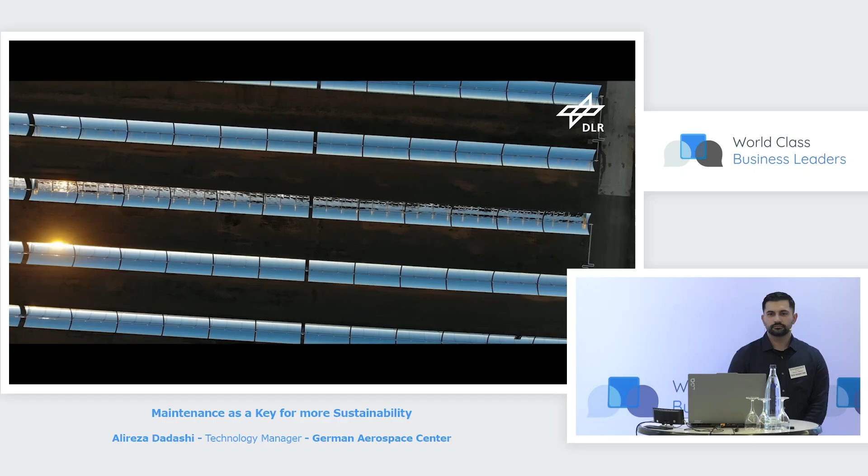Our destiny is always to go and see what's further and what's next. Let's go.

Right, so as you can see, we have lots of different projects, lots of different topics that we are covering, but not all of us are doing research. So we have the research institution, but we also have the space agency, which represents the interests of the German government in Europe and worldwide. And we also have the project management agency. That's why you might know DLR as well, because they distribute funding from the ministries.

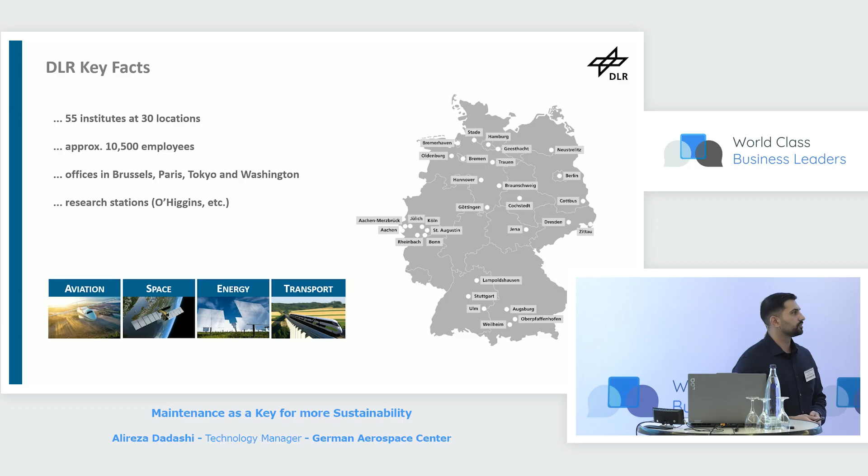Yeah, we cover aviation, space, energy, transport. So there are a lot of different topics and collaboration opportunities, of course. Some key facts: we have 55 institutes all over Germany, also some sites abroad, and roughly 10,000 employees in all these locations. And my institute is the Institute of Maintenance, Repair and Overhaul.

And we're located up in the north in Hamburg. We were founded in June 2017, so we're relatively young and relatively small with 60 employees. But still we try to really position the research into this maintenance perspective, really covering those questions. We've heard some keywords today, Marvin, you mentioned predictive maintenance, and these are the really relevant challenges in the industry that we are contributing to. And we also have labs.

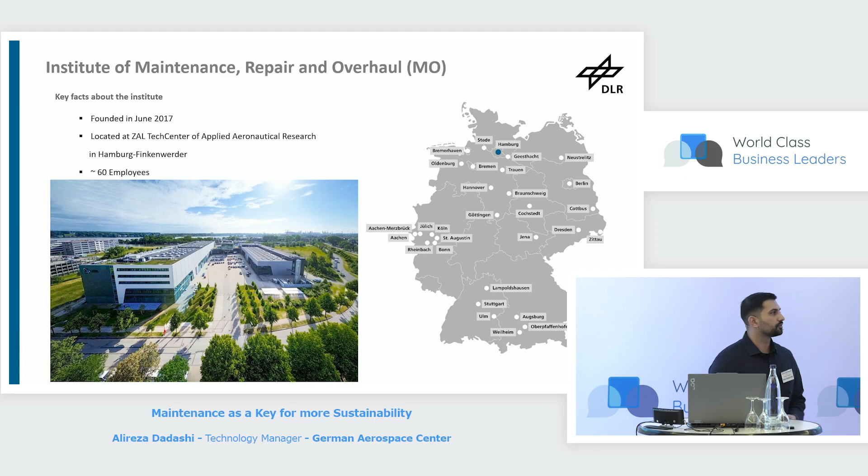So we have a big MRO lab in this building in Finkenwerder. Those who know Hamburg know it's the place where Airbus is, south of the river. And we collaborate with Airbus, of course, and also other companies in this sector. Looking at our institute in terms of our strategic research, our vision is we maintain mobility for a sustainable future. And we do this with 3 dimensions.

These dimensions consist of, firstly, the product life cycle perspective. So really look at what are MRO concepts and strategies? How can we develop those along with the product life cycle? We look from the design phase until the end of life of a technical asset, primarily an aircraft, and look at the topics of environmental analysis and circularity, but also the cost-benefit perspective. This is the life cycle modeling.

The second department is really looking hands-on at the maintenance technologies. These are the people working in the lab, focusing on technologies for assisting the human, human in the loop, for example AR, VR assistance systems. Then we have robot assisted inspection and repair, focusing on robot inspection and robot activities in, for example, engine maintenance. And we have technologies for more data-centric MRO, because a lot of data is already in the aircraft from all the sensors, and the MRO equipment is also generating lots of data.

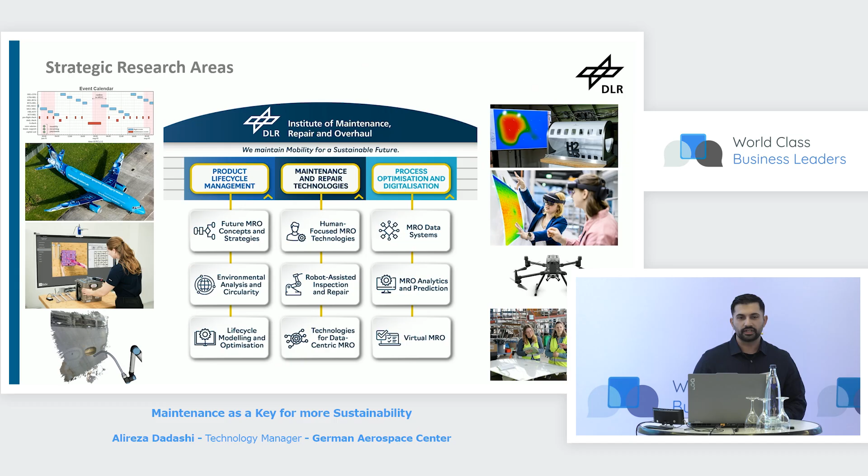So data is a good keyword for the last dimension, process optimization and digitalization. This is where all the data comes together, and we try to work towards digital twins where we can analyze and perform future predictive analytics, AI-based models. So this is what we cover at a first glance, and I want to talk firstly about maintenance in general.

So what is maintenance? If we look at the sky, we see the aircraft, and we don't think about maintenance, which is a good thing, because if you think about maintenance, it's a bad sign. We hear about maintenance when we have delays, hopefully not when we are already sitting in the plane. But there are, of course, lots of different activities in maintenance. According to the standard DIN EN 13306, the main task is to maintain the target condition of the technical system, and it encompasses activities that aim to prevent failures, restore functionality, and continuously improve the system's performance.

So if we look at the right-hand side, this is the corrective activity. This is after detection of a failure. That's what you don't want to have, because then it's already too late. So then it's about where do we have, for example, a crack on the fuselage, on the wing? How deep is it? What is the diagnosis? And then we try to repair it, maybe temporarily, and check if the function is still working.

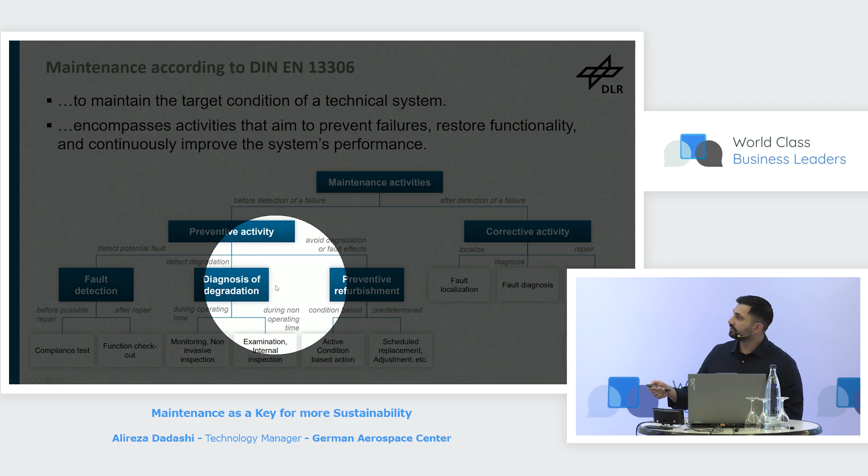The better side is the left-hand side, because then you can get ahead of the failure. So you try to be preventive. First you can detect the fault by the function, so you do function tests. Then you have the diagnosis of the degradation, detected, for example, by condition monitoring. So you have lots of data, lots of sensors, and you try to really monitor the health status of the component by, for example, regular inspections, non-invasive inspections, internal inspections.

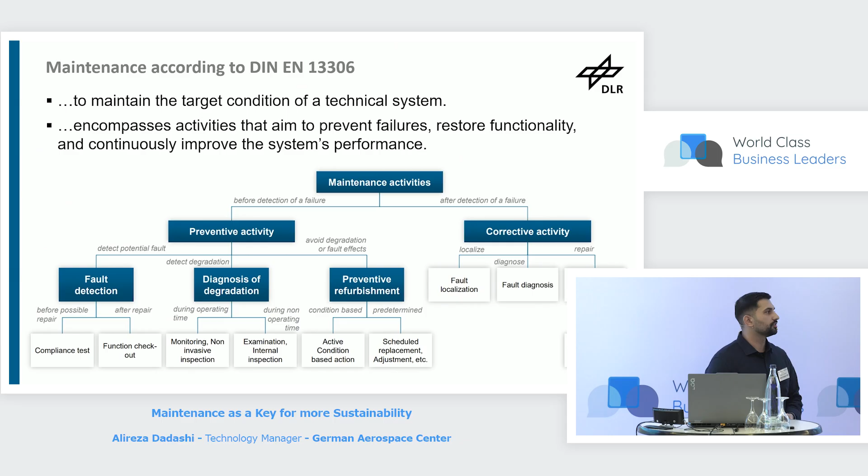A lot of them are GVI, which is like a general visual inspection. For example, the simple one, which you all know, is like the pilot doing the ground check, going around the aircraft. And the last pillar is the preventive refurbishment, which is this active condition-based action. And this is also towards the perspective of prescriptive maintenance, where we really plan the schedule and plan the action before the actual maintenance failure.

Okay, so far so good, but why do we exactly need maintenance? The answer is simple. Maybe going back here, this is the end of life here, and we want to really extend the life of the aircraft, and we don't want to see this, we want to see it maybe after 30 years, which is the average lifetime. Well, it's simple. It's profitable. It's required to ensure safety.

Sometimes we have to do it because of regulations, and sometimes we want to do it to save resources. So there are different motivations for companies, researchers, people, and you can only choose one of them, and it's still really relevant and critical. This is the picture that I told you we don't want to see. So to sum it up, maybe maintenance is sustainability economically and ecologically by means of most efficient technical usage of resources. So we want to really have a sustainable operation of technical assets in the most efficient way.

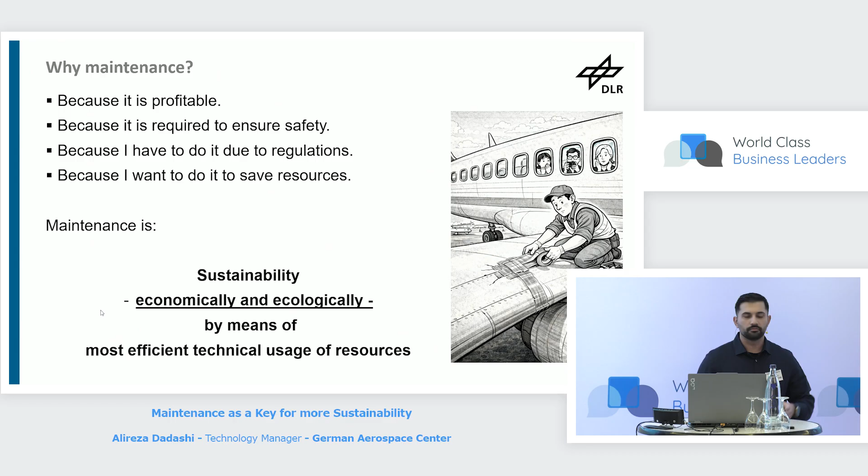And the impact could be, of course, longer asset life cycles, as I said, more efficient operations, because the engine, for example, if you regularly inspect your engine and repair your engine and keep it maintained very well. It's the same with your car. You have also a more efficient operation, which is at least better for your budget and better for the environment.

Then we have the third impact category, maybe, which is more sustainable MRO processes. So MRO, which is maintenance, repair, and overhaul, can enable longer life cycles, which is sustainable and efficient operations, but the MRO process itself can also be greener. For example, reducing the waste, reducing the water usage, reducing the resources, minimizing and using the resources efficiently. So the MRO process itself is also one potential.

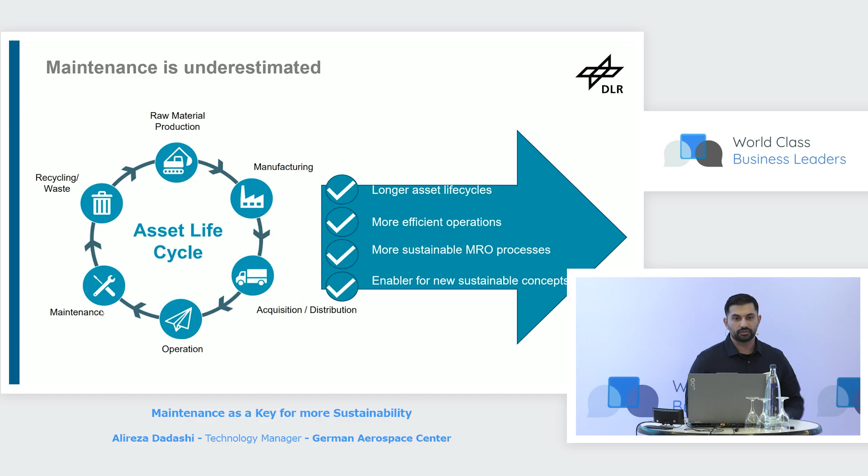Or, for example, fuel cells. So if you want to use hydrogen or fuel cells in future aircraft, I'm sure you've read about it. There are nice, fancy concepts out there for the future of aircraft. Well, someone needs to think about maintenance, because without the maintenance technologies and concepts and processes, we cannot have these kind of sustainable propulsion technologies like hydrogen, battery, full electric, and hybrid electric. So these are the categories, and as I said, maintenance is underestimated for now, so it's starting to shift.

So there's a new regulation, and you know it, it's the right to repair, which has a huge impact in the consumer industry. But yeah, we are closely observing this, because right to repair can really turn the mindset and the culture, not only consumer, but also in other industries, especially in the electronic sector, with this fundamental shift. And environmental regulations tightened, and consumer preferences change as well. So your brand can't really afford to view sustainability only as an afterthought. That's also the case for aviation.

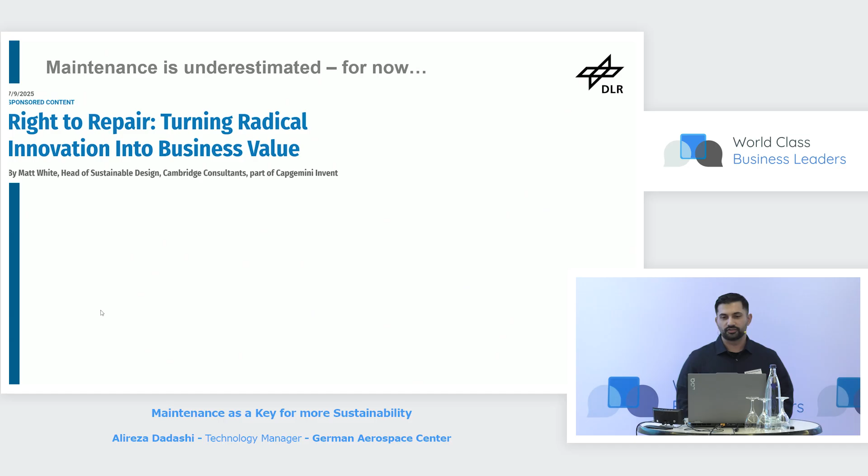And some see maintaining or repairing things as important as innovating things, as we can see, especially during time of inflation, high prices, maybe during COVID as well, and also with higher interest rates and lower investments, maintenance plays a really more important role. And it lacks the glamour of innovation. Let's phrase it this way. It's mostly, as I said, noticed in the absence.

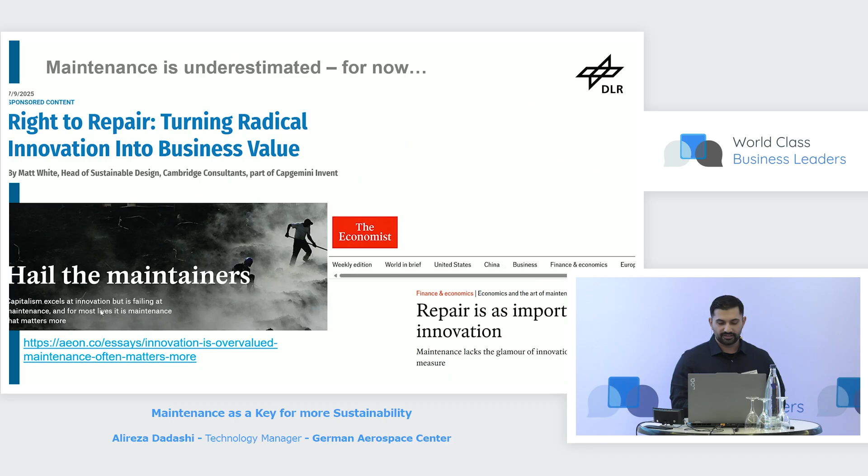Maybe another perspective, what I caught in the news, repair is as important as innovation. So we have also this kind of direction, and yeah, some really criticize why it's like that. So we can see some positive perspectives now. Hail the maintainers, we talk about innovation, but we are failing in maintenance. And some say this matters even more than innovation itself. And in the end, we have the European Green Deal as well. And I was going through the law document and also through the proposal of this Green Deal. And maintenance was not mentioned at all.

I don't want to say they didn't think about it. There is, for sure, inspection and repair and everything. But it could be more relevant in these kinds of thoughts and concepts. So what do we do? Green maintenance. So, Green Deal. Green maintenance would be the answer.

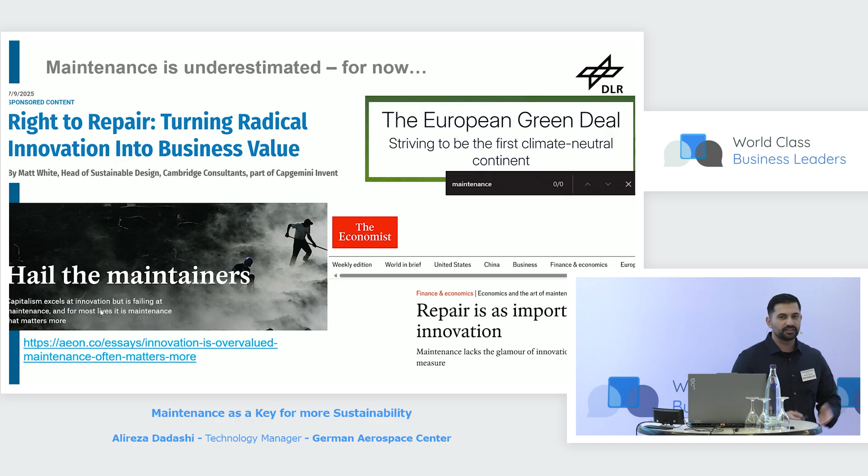What would be green maintenance? That's one question, and there are some studies out there. I brought you this figure which categorizes green maintenance into 3 pillars: environmental compatibility, for example leakage prevention, landfill problems, waste treatment policy. Then we have energy efficiency, which is the ease of maintenance, for example tribological materials, reduced friction, and paperless maintenance, of course. And also, if you think about remote MRO, minimizing unnecessary travel.

So basically, you think about maintenance as a box. The input for maintenance is the product to be serviced, and the output is the serviced product, the maintenance waste and the energy wastage. There are different potentials, and we also have constraints: material, energy, labor. We have regulations and standards. We have the capability of the technicians, who also have to be trained, because we have new technologies in the aircraft and maintenance has to catch up. And maintenance strategies are evolving with new technologies like AI and digitization.

So these constraints pose requirements for good maintenance, which we can see here. Maybe it's similar to ESG with the environmental and the social aspect. The third one would be the social perspective, human health and safety risks, which is extremely important in the maintenance sector for the mechanics: proper lighting, ventilation, safe maintenance steps, using non-toxic lubricants and non-toxic materials.

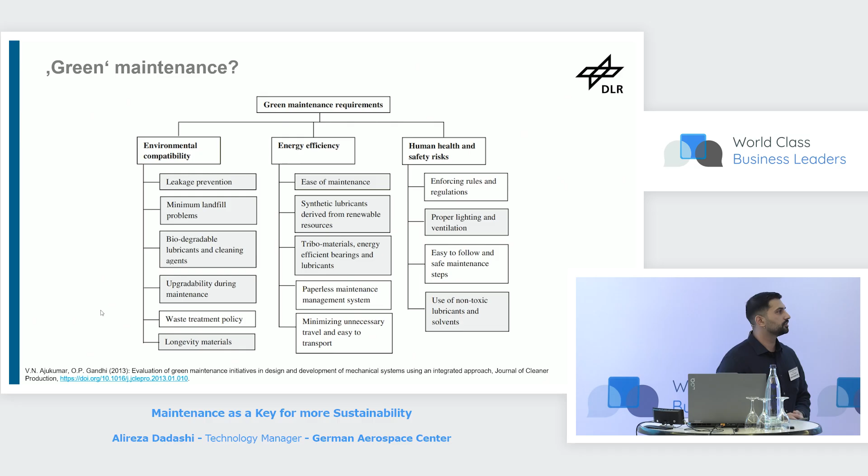I brought you some examples for each of these pillars to give you a more concrete perspective on what kind of projects we work on. Before I do that, I want to show you one method we implemented, which is how we sprint from research to innovation. It starts with technology intelligence. We search for keywords and relevant trends, for example sustainable MRO, to see what's out there. Then we do sprints in 3 to 6 days.

This is level 0. In the next level, we spend 3 to 6 weeks to really deep dive into a problem or an idea and analyze it. If we have a positive outcome of this phase, we continue with level 2, a sprint of 3 to 6 months, where we gain deep knowledge and demonstrate potential solutions. In the end, we look for technology transfer to contribute the technology to industry and society. This is the method we used for these sprints and projects.

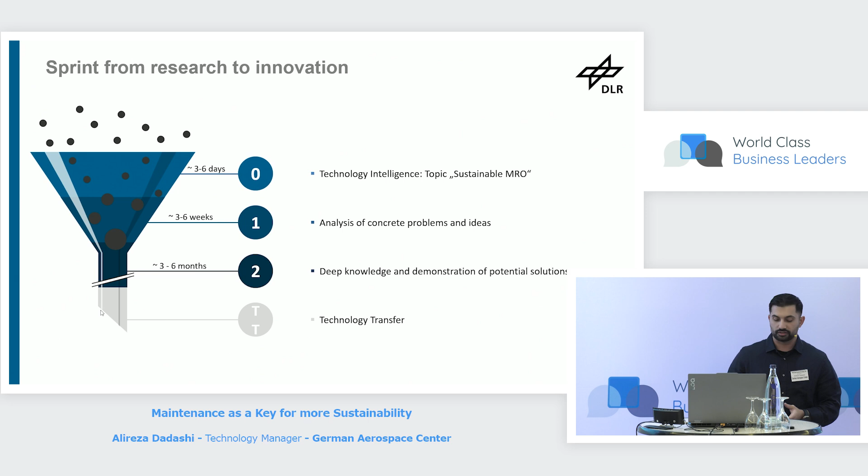I would like to start with the first pillar, environmental compatibility. One example is engine wash. Engines have to be cleaned, and the aircraft engine itself is a major cause of environmental impact and operating costs. Engine maintenance is one of the biggest cost factors in MRO. And let's not forget the critical safety relevance. So they need to be cleaned regularly, and the wash system is not only good for the plane, it's good for the environment.

If you use water, it's a bit of an old technique, but it uses atomized water, collects the effluent water and purifies it for recycled use. It's stated that washing the engines will reduce engine fuel burn by as much as 1.2%, which is a really huge number. So there are improvements in fuel efficiency and also cooler operating temperatures. This is the effect of the engine wash alone.

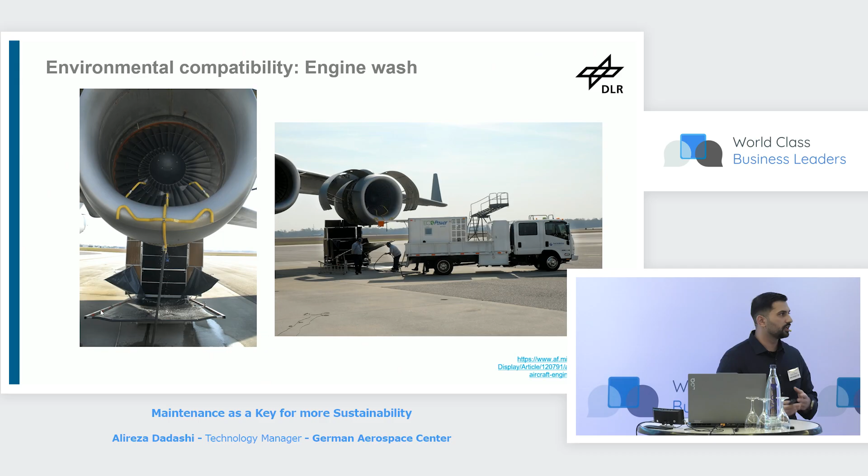And there are new methods now. There's a patented method using foam instead of water, which removes the dust and dirt particles in the engine and is even more sustainable. So the aircraft operation gets more sustainable, and the maintenance process itself also gets more environmentally friendly. The next example is a project we had on hydrogen leakage detection.

I told you we need to think about hydrogen if it should operate in an aircraft, and we should think about leakages, because leakages with hydrogen wouldn't be a good thing. So we try to use smart sensors. We combine different sensors to not only detect but localize the leakage. This works on time series-based analysis, so we can get the anomalies and see where a potential leakage might be. Health monitoring is the outcome of this.

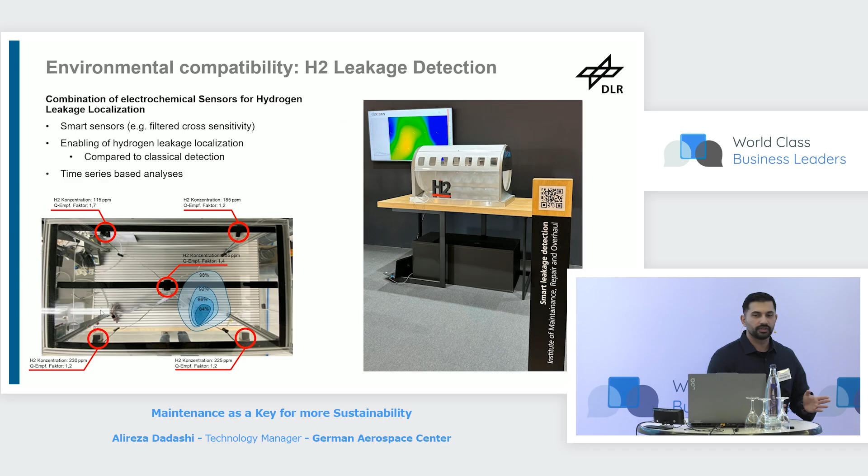An unplanned failure is the least sustainable option. So we want to have everything planned, every potential failure. One colleague of mine once said, if it moves, it wears, and if it wears, you have to maintain it.

So you can really think of this like a thing that you really have to do in every technical perspective of an asset. The second dimension is the energy efficiency. So we have a virtual MRO, which is basically another research area at our institute where we have digital models of processes, of supply chains and resources. And in addition, we also have simulations for complex process chains.

So it enables basically to perform maintenance remotely, which obviously reduces the traveling and the transport. And this field closely relates to the human-focused MRO research that I mentioned, and contributes to shaping a human-centered technology, which is more effective, more safe, and we have a sustainable execution of MRO operations. So we have a vision lab in our facility where we research on this kind of VR, AR technologies.

On the right-hand side, we can see a person wearing a VR HTC headset, and on the lower picture, we can see what the user view is on the virtual twin. So basically, we can integrate sensor information, we can display the sensor information into the virtual environment.

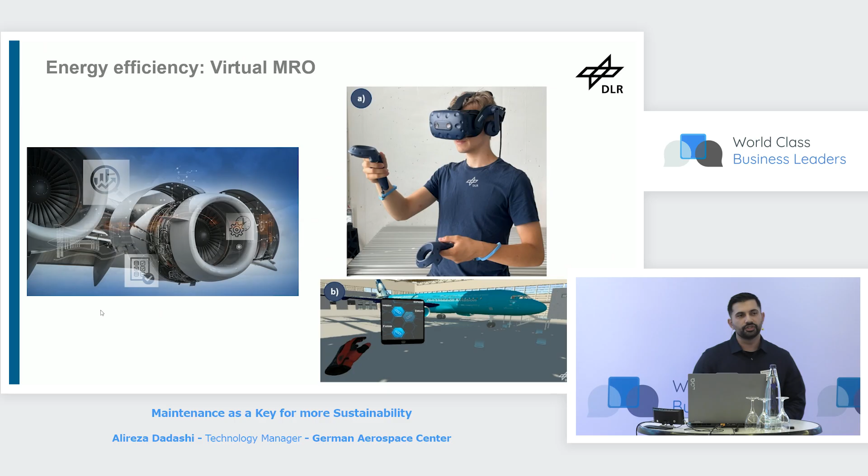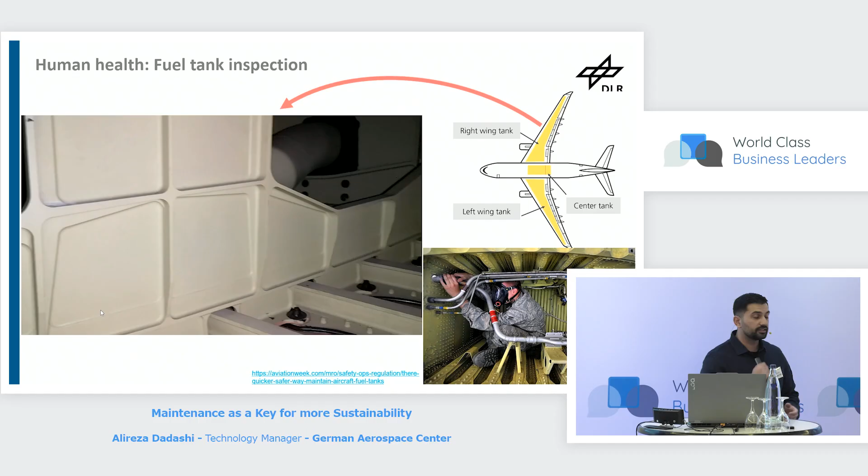The next example that I brought is human health fuel tank inspection. So what we can see here is the inside of a fuel tank. The fuel tanks are in the wings. There's also a center fuel tank, but here we are in the right wing tank currently. And as you can see, it's not a good working environment. It's not safe, it's not comfortable, and as you get more into the end of the wing, you cannot really crawl into the tank. You just have to put your light and your head into the access panel and just have a look.

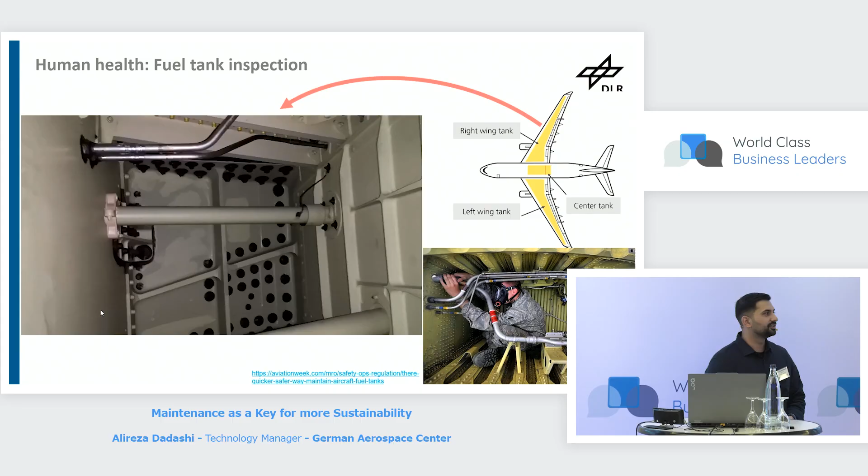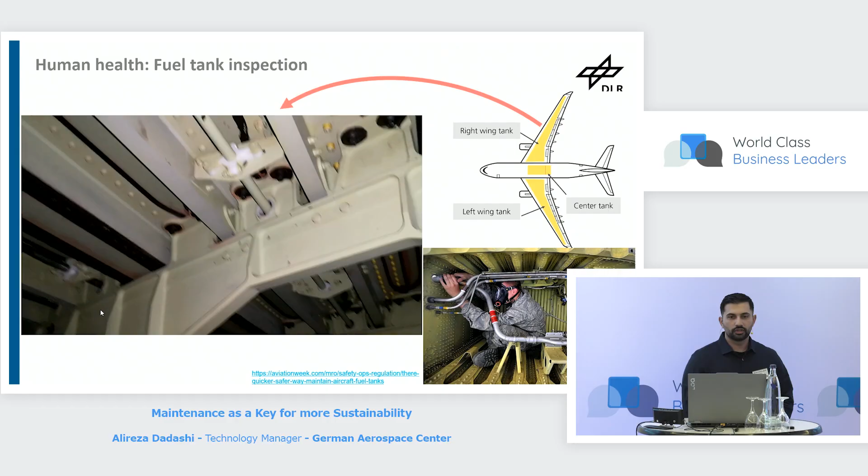So we talked to mechanics that perform or used to perform these kind of tasks, and they didn't want to do it at all. So you can really think about why no one has solved this problem, why the mechanics still have to do this manually. So we had a closer look into the problems. The first one, of course, the human health. It's non-ergonomic, as I said, and the potential is really to support the staff. We have overhead tasks as well. Then we have the complex preparation, special equipment, and it's really difficult to focus on the value-adding task, which is to inspect this safety-critical component.

And the third dimension of this problem is the digital transparency. When the aircraft comes into the hangar every 12 years for the big check, the D check, you don't know what is inside. You just don't know. So it can be a surprise. And to have this digital transparency before the aircraft is in the hangar really supports efficient maintenance planning to even reduce the ground time of the aircraft. And this is what we want to do. We want to increase the aircraft time in the sky. So these are the problems that we identified.

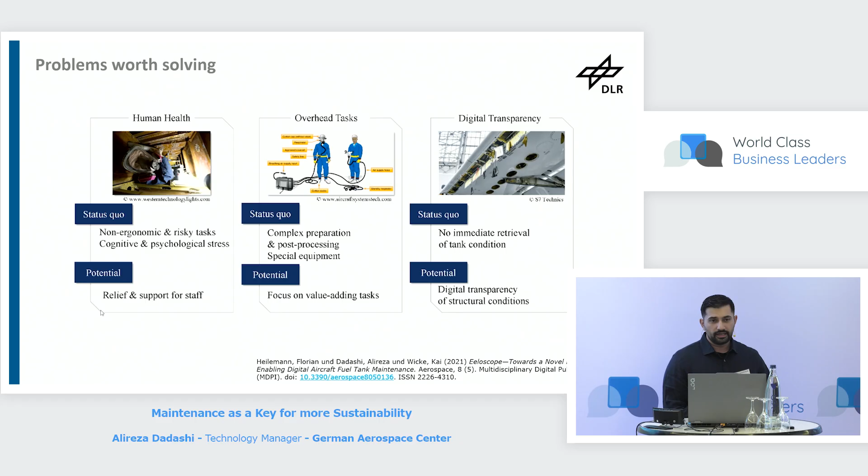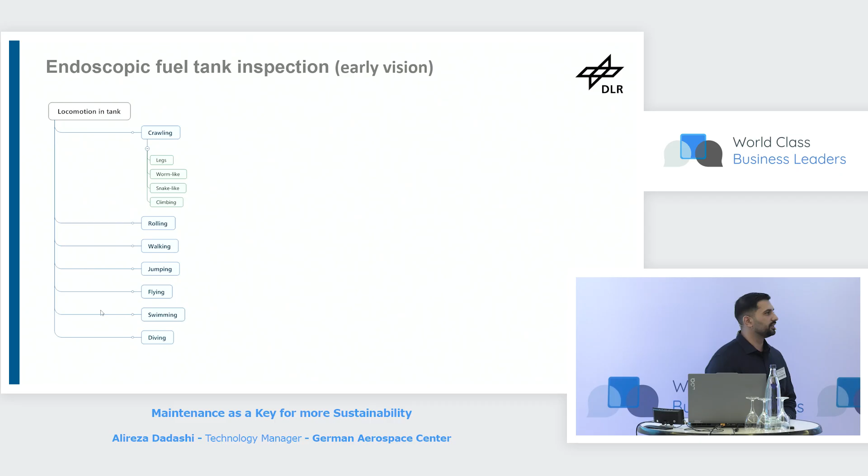And let's have a look at a potential solution. We thought about, okay, what's the first question? How can we move inside a tank? What are potential ways to locomote in a tank? We can crawl, we can roll, we can walk, we can jump, fly, swim, dive. So this is a creative approach, maybe you have heard of design thinking, to think about different ways to support this activity. And in the end, we came up with a diving endoscope, which we call the Eeloscope.

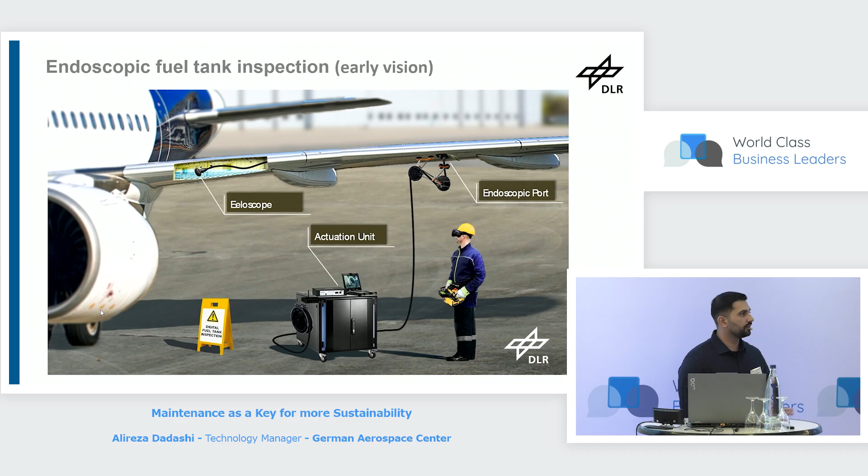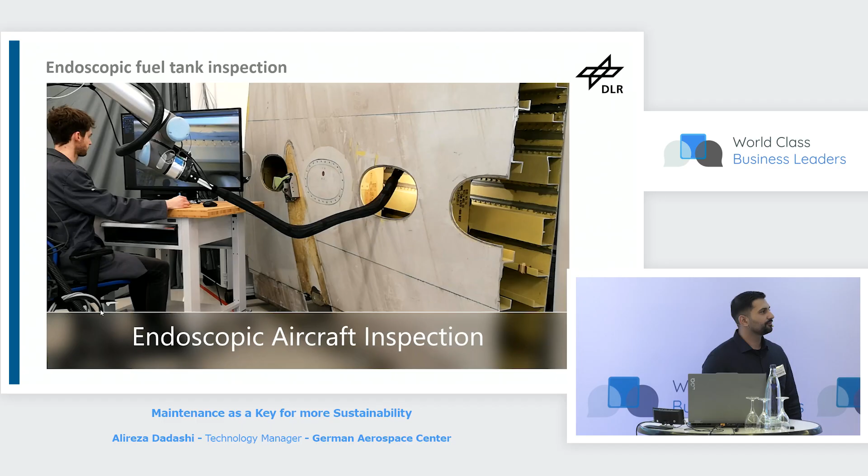There is an endoscopic port where we can enter the tank, and you can see the mechanic standing next to the tank and performing this maintenance activity in a better working environment. And I brought a video for this as well, just to illustrate how it works, at least in the lab. So this is the current status. We're not flying, because flying is difficult and complex for different reasons.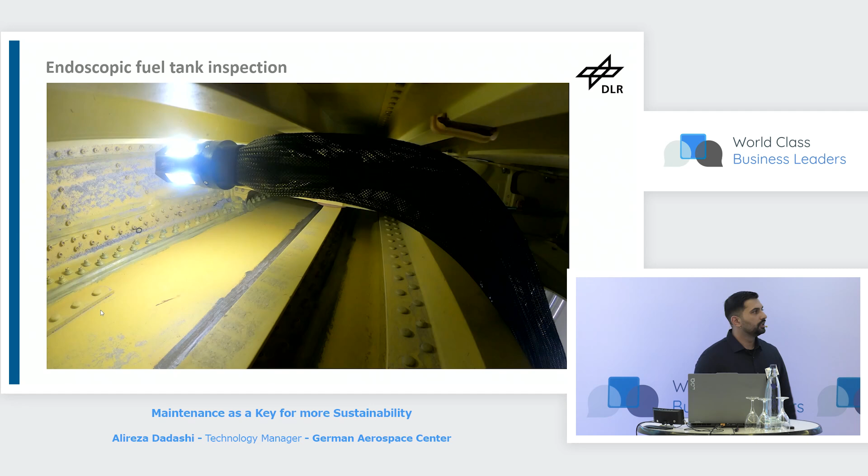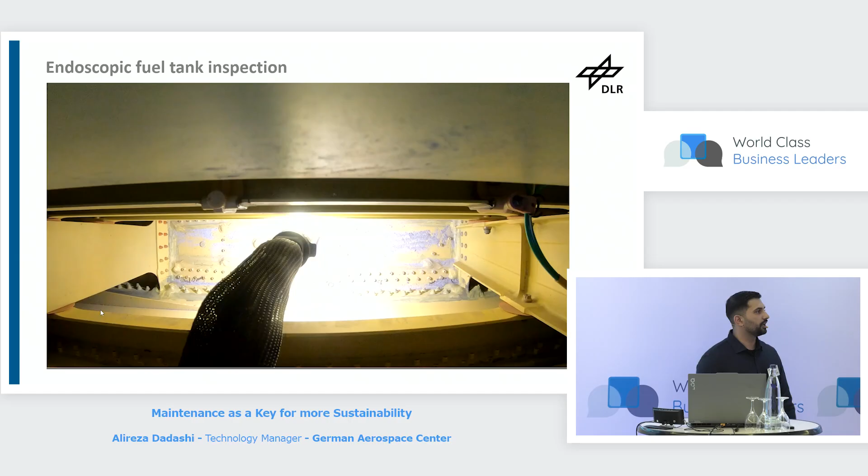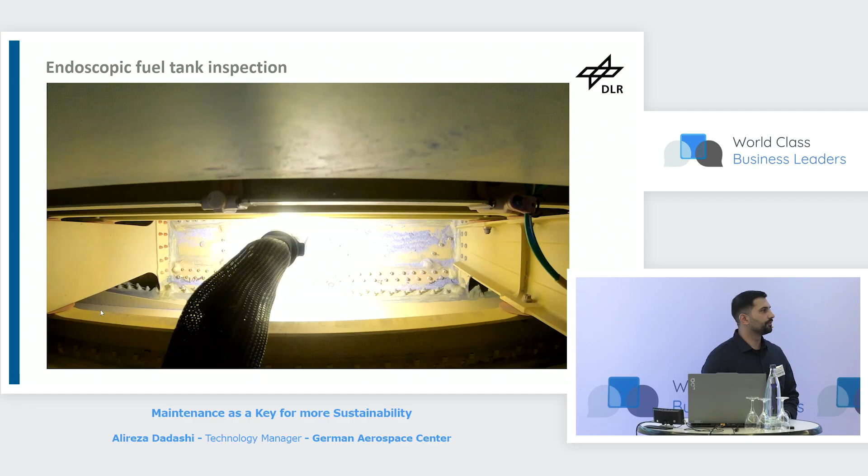But here we have an endoscope operating in a dry tank with stereo cameras to really inspect and to ensure that we have inspected every part of the inside of the tank, which in the end ensures a sustainable process with no risk for the human, because the stories that we heard from humans there are really horrible.

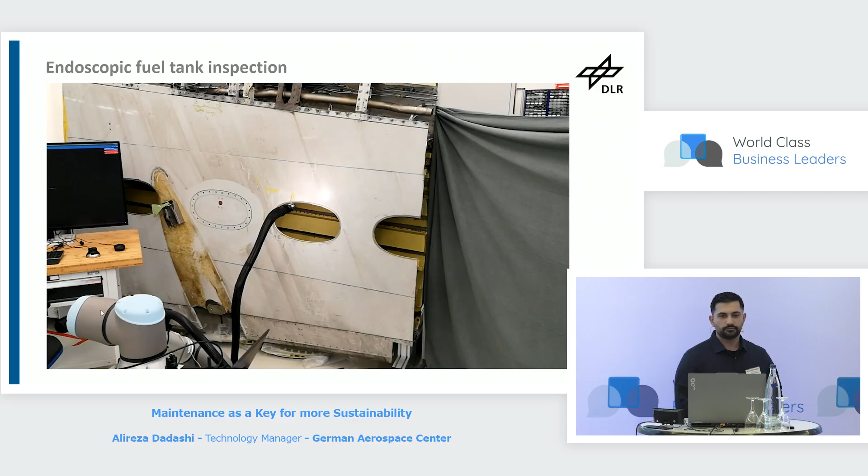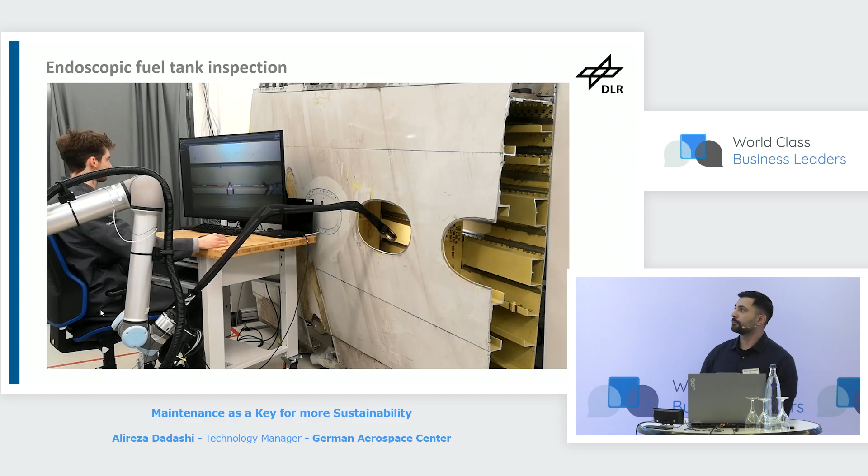Yeah. Intuitive control, and you can really see the person can concentrate on the task. And the philosophy is to get the person outside of the tank, but keep their eyes inside of the tank.

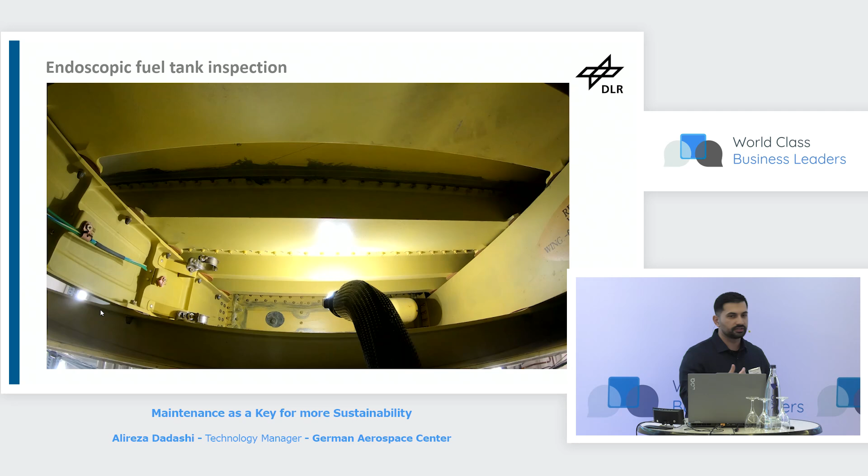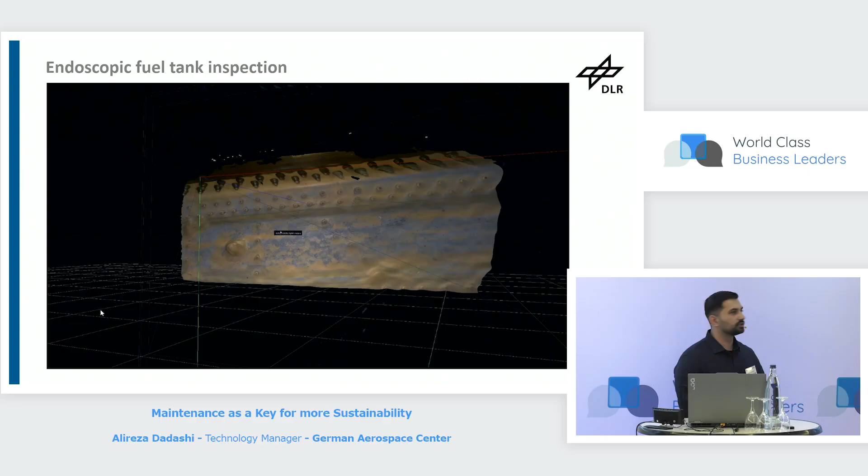So, I think that's good for now. And with this impression, I would like to conclude my presentation. If you ask me how to sum up the key message in one sentence, it would be: if you can't maintain it, you can't sustain it.